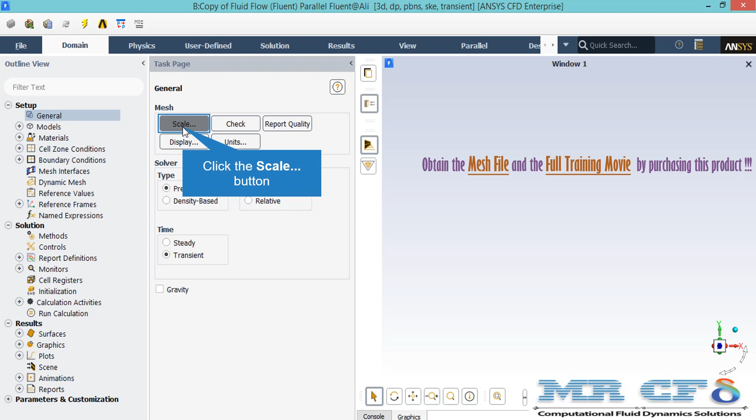By clicking on scale, a new window will appear showing you the domain extents of your geometry. Also, under the view length units section, you can see the default geometry units, which is meter in this project.

Also, under the scaling section, under the mesh was created in, you can change the settings in order to activate the scaling factors beneath that.

For example, your geometry and mesh was designed in a software which its default unit was millimeters. By activating these scaling factors, you can change this factor to your desired factors in order to set the length to the appropriate unit.

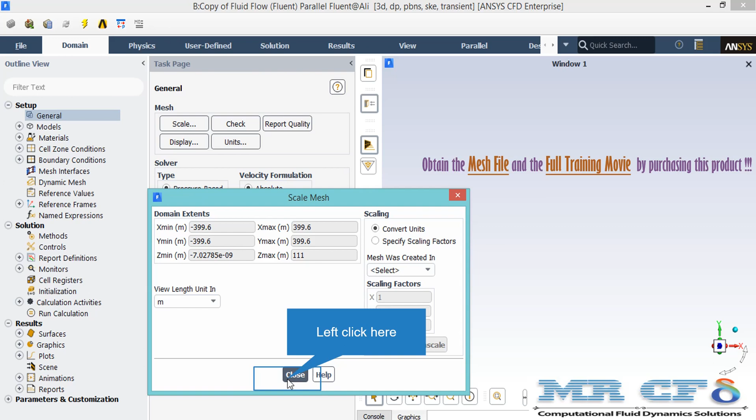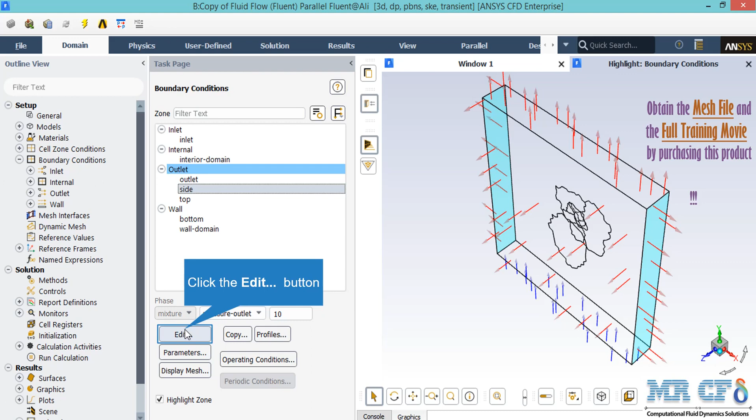And if you click on this outlet boundary, you can see that the type of this boundary is defined as pressure outlet. If you click on Edit button in the appeared window, the most important point you should pay attention to is the gauge pressure, which is defined to have a value of 0 Pascal, meaning that our airflow will exit our computational domain to the atmosphere.

Now if you select each of the wall boundaries and then click on Edit button, in the appeared window under the Momentum tab, you can see the stationary wall motion along with no slip shear condition are defined for these walls.

Now if you click on the Thermal tab for this wall, you can see the temperature thermal condition is defined and the value of temperature over this wall is defined to be equal to 300 Kelvin.

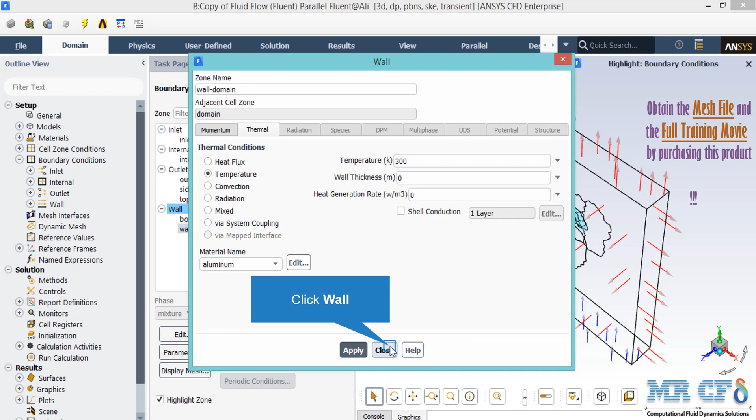We may also change the under relaxation factors. These factors may be between 0 and 1. Based on the simulation and the project we are doing, we may change these under relaxation factors. But remember that the values set here are the recommended values for the project, and we highly recommend you not change these values.

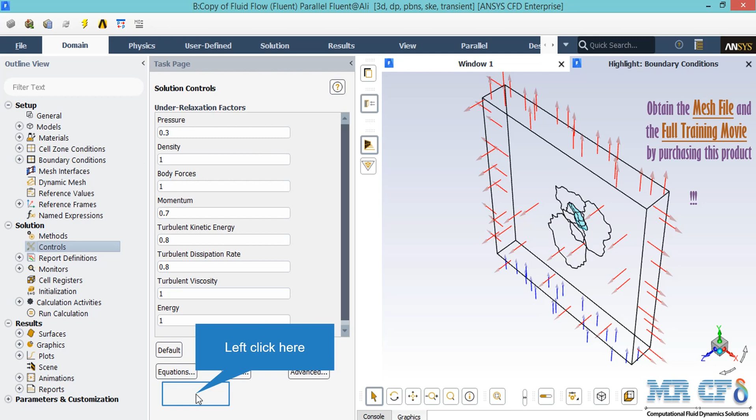After double-clicking on the initialization button, a new window will appear showing you different methods of initialization, hybrid and standard. In the standard initialization method, you get to choose the first amounts and values for the first iteration of the simulation progress. These values refer to the values used in the first iteration, and if you choose the values for each parameter wisely, your simulation progress will finish sooner.

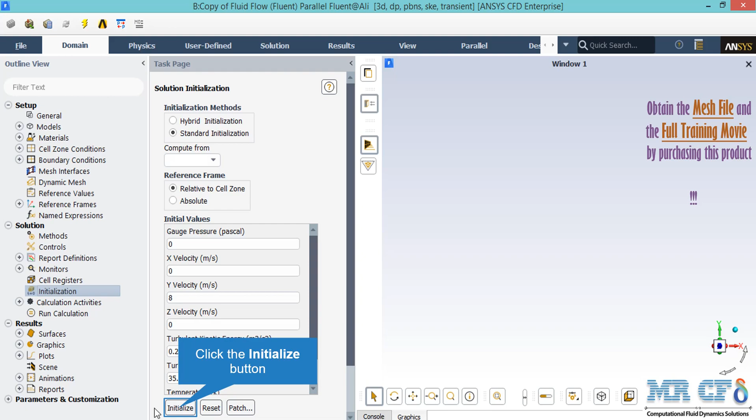It should be mentioned that you can also choose the first values or the initial values by just clicking on the Compute From drop-down list and clicking on one boundary. For example, by clicking on Compute From All Zones, the software will automatically average the values in different zones and boundaries and put those values in the initial values for the software.

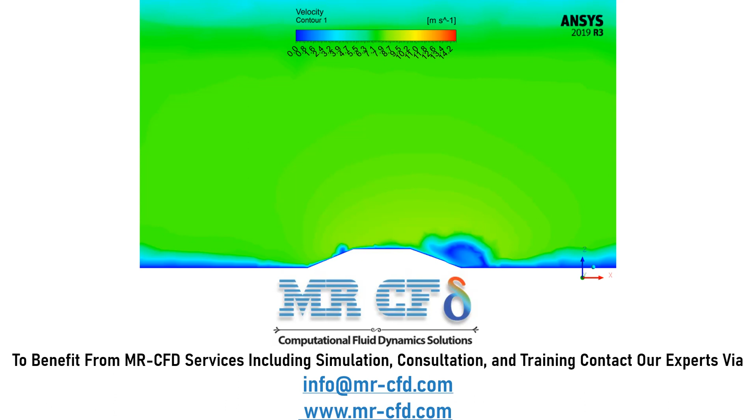Now in this part, we have extracted 3D and 2D contours by the means of CFD Post software. In this slide, you can see the velocity distribution over a plane which is placed on the middle section of our computational domain. Also, you can see that behind the mountain, there is a region with a decreased velocity indicating that vortices are being generated in that region.

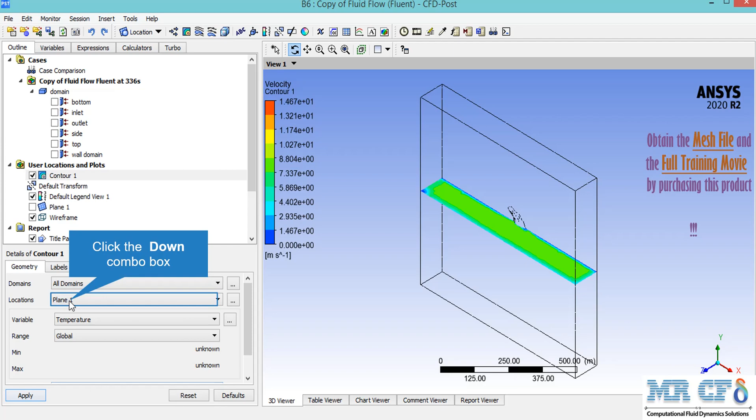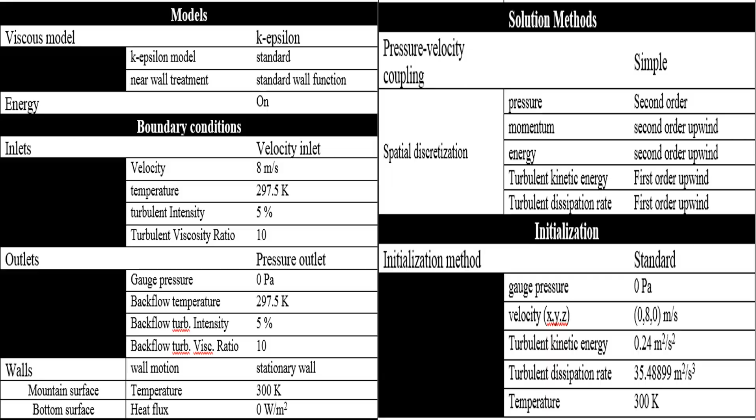The study of natural phenomena has always been of interest to researchers. The purpose of this project is to study the airflow and its heat transfer on the surface of the mountain that it encounters in its passage, which is also effective in determining the air passage for the aircraft.

In this project, the air enters the fluid domain with a velocity and temperature of 8 meters per second and 297.5 Kelvin respectively. The energy model is activated due to the nature of the flow, which is of the external flow type, and considering the airflow velocity, which has consequences such as flow separation and vortices behind the mountain, the K-epsilon standard model has been used to analyze the turbulent flow.

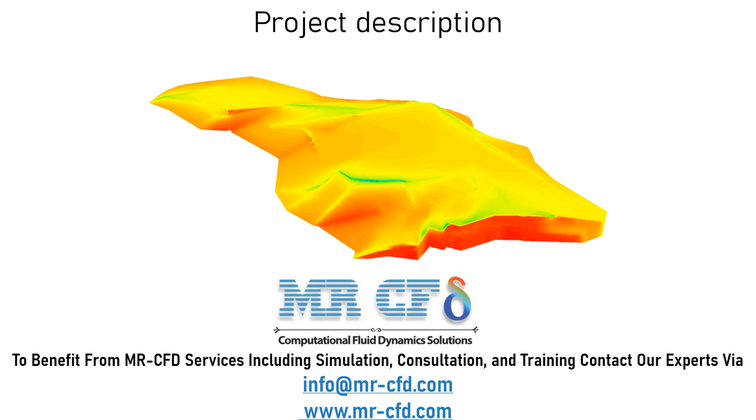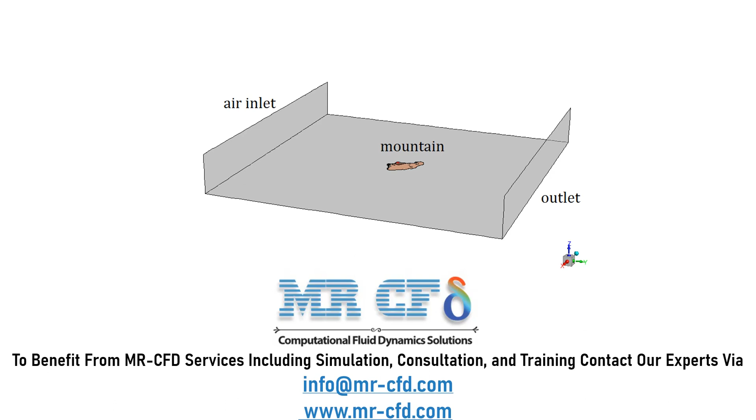The geometry of this model is designed in ANSYS Design Modeler software and consists of an airflow inlet, the mountain itself, and three different pressure outlets, including top and side walls and the main outlet.

The model of the present project is meshed in ANSYS meshing software, and the mesh type used for this geometry is unstructured, and the element number is equal to 1,250,044.